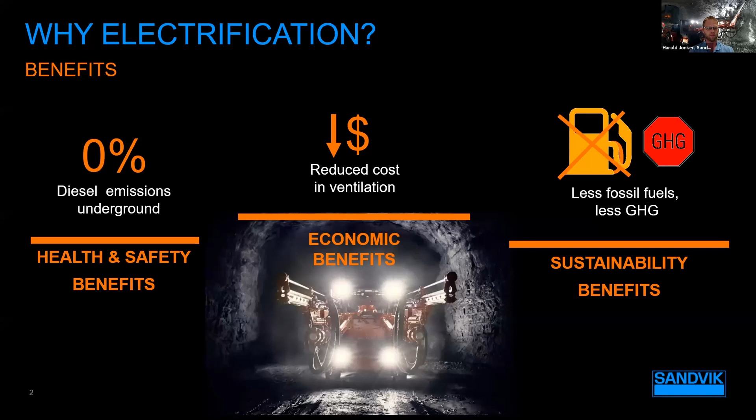Now, I've been fortunate to have joined Sandvik Canada a little over a year ago after spending a decade in Australia, where I was supporting drilling automation projects. I inherited a healthy install base of battery electric equipment, as you can see on the screen here, and I look forward to supporting the industry making the switch to electric propulsion.

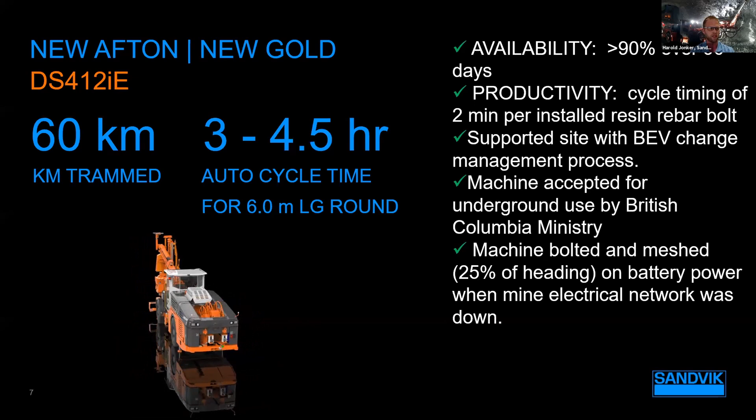On my arrival in Canada, I supported the change management process to introduce the battery electric automated bolter that you see on the screen here. 60 kilometers trammed, 2-minute automated bolting cycle to deliver 6-meter round in about 3 to 4.5 hours. So introduction of battery electric equipment, the change management process, working with the mines department in BC together with the mine to understand the challenges. Great project, and happy to see that it completed its site acceptance test.

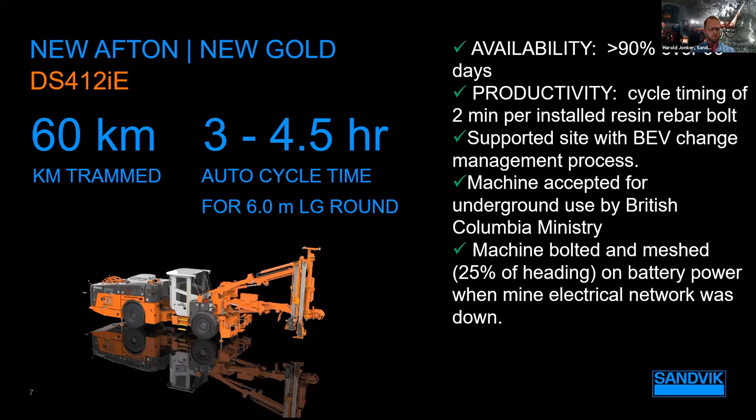Moving on to our Borden Lake drills, where we have several development drills and our long hole drill, so 4,000 kilometers trammed. These drills have been there since approximately 2017, so for about 5 years. And over that time at this site, 1.5 million meters drilled and 0 emissions.

Now, Luc was the former project manager on site. He expressed that he was impressed with the minimized components. The reduction or elimination of diesel engines also means no more oil changes. And being battery electric with onboard charging, no external charging stations are required as well.

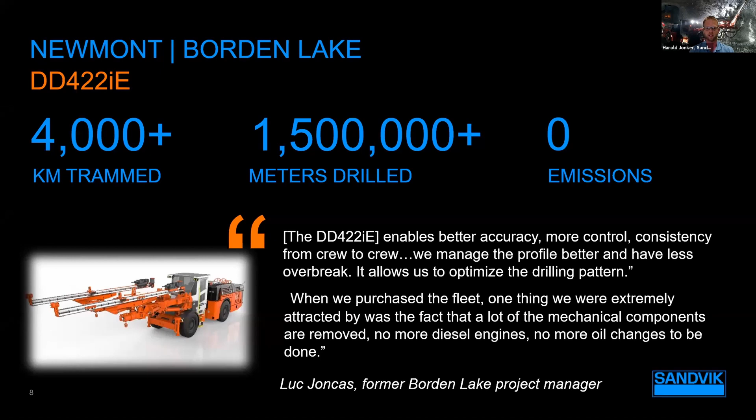So moving to a different product line, I am from the underground drills team, but from the load and haul side at New Afton, we have the battery electric LH518B loader. In addition to 0 emissions, this loader delivered on productivity, with improved mucking time from 9 minutes to 4 minutes compared to the diesel equivalent.

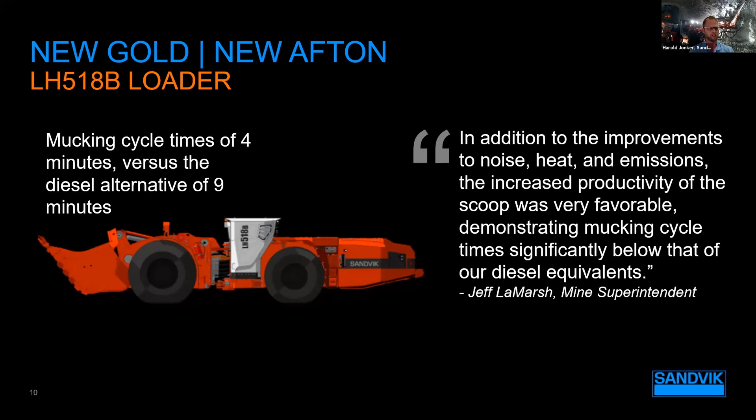And then rounding out the battery electric equipment, we have the Z50 battery truck at Pretium. This showed that battery electric power definitely is a game changer. In addition to zero emissions, it smashed the productivity on site with 42% more tons and 22% faster than the diesel alternative on a 15% grade, and with a speed of approximately 9.5 kilometers per hour.

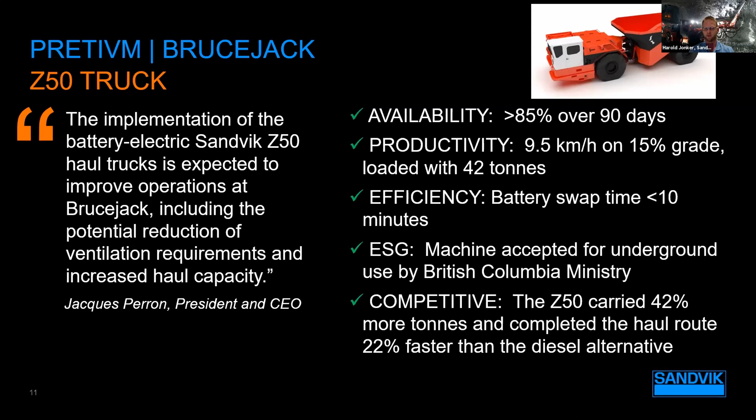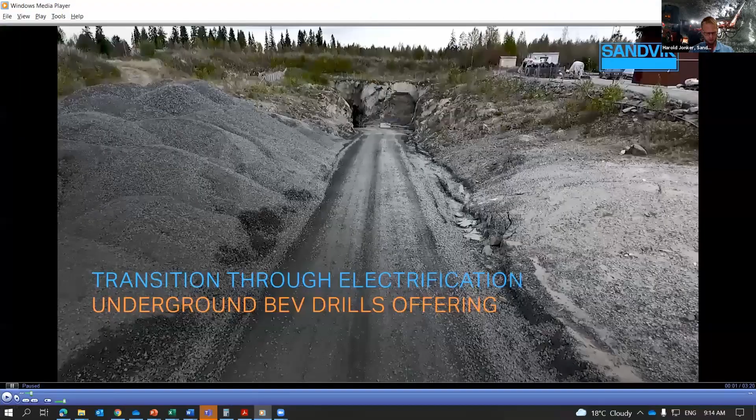So from here, I'll just run a video on some of our battery electric equipment. Hopefully it comes through and it is playing as well. Just bear with me for a minute as I switch that across. Is that still streaming through okay there on your side, Alicia?

I assume it is. Yes, it is. It looks great. Yeah, cool.

So what I'll talk about while the video is playing is a bit more about the savings and the future of the battery electric equipment. And then I'll switch to any questions the audience might have for the last few minutes of the presentation.

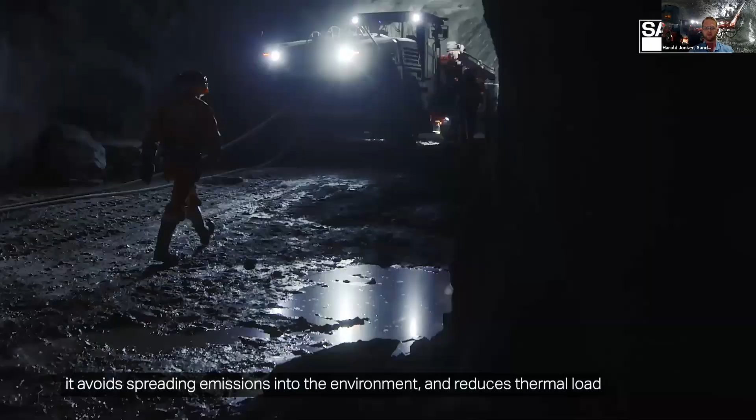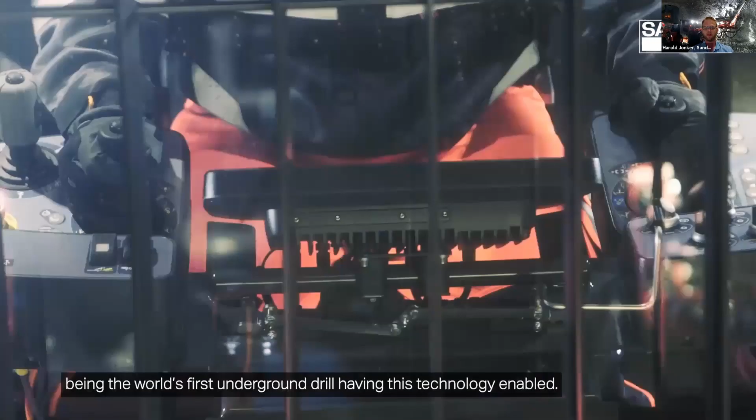So yeah, battery electric equipment, it gives major CapEx savings for an operation. You can build smaller tunnels because the size of battery electric equipment can be smaller with the same capacity. You can install less ventilation, which requires less cooling. And with the OpEx savings, fuel is cheaper. Trucks and loaders, they move faster, so they can move more tons.

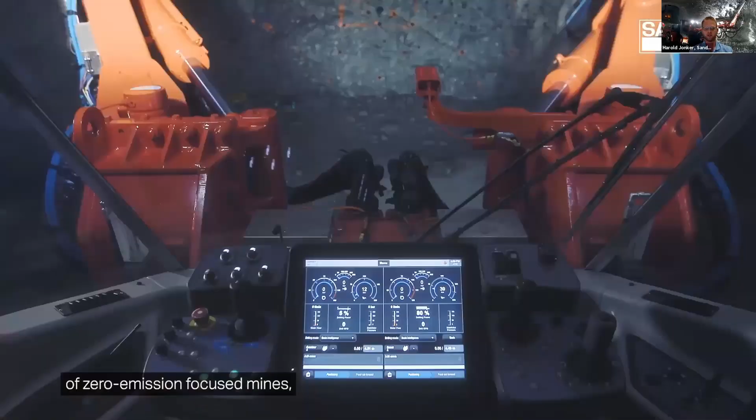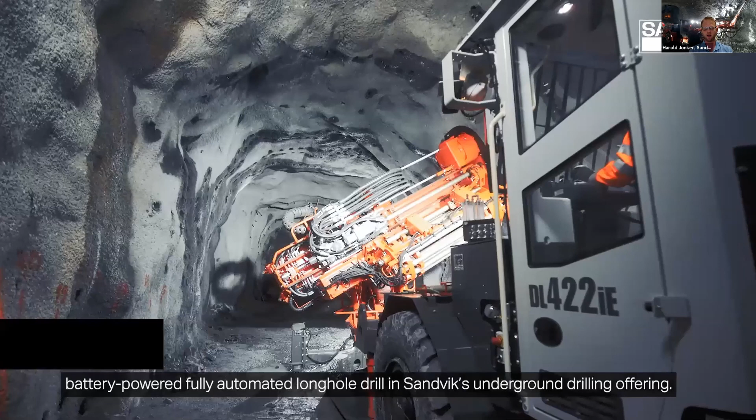Now, if you compare electric equipment versus the traditional diesel equipment today, and if you compare the CapEx and also the OpEx over the full life of the machine, already today they're on par with each other. Yes, the CapEx is higher for the electric, but the OpEx is lower, based on the energy and the maintenance costs. Now, when you factor in the savings the mine makes on ventilation and cooling, there's a strong business case for going electric.

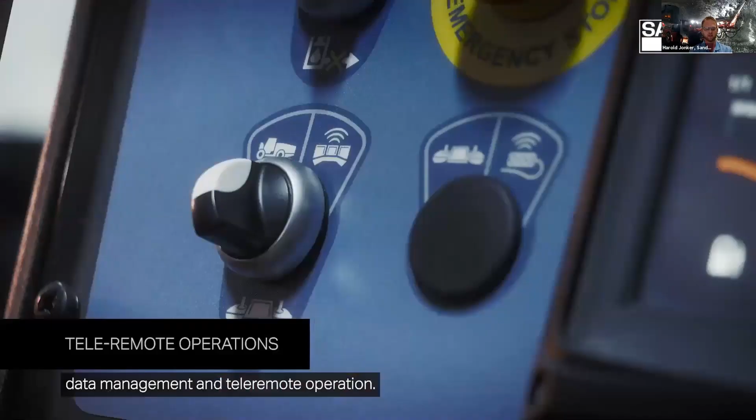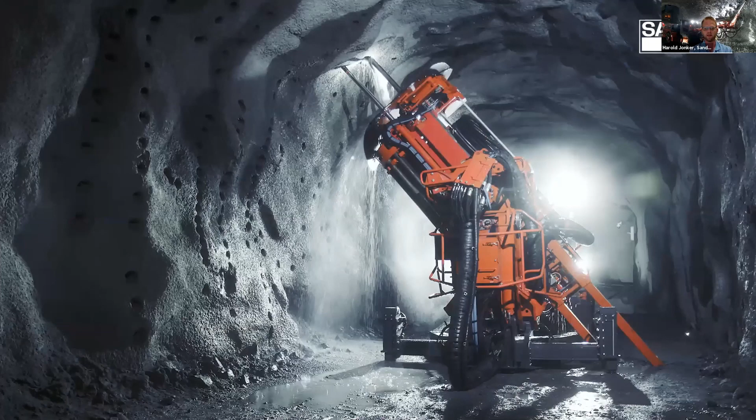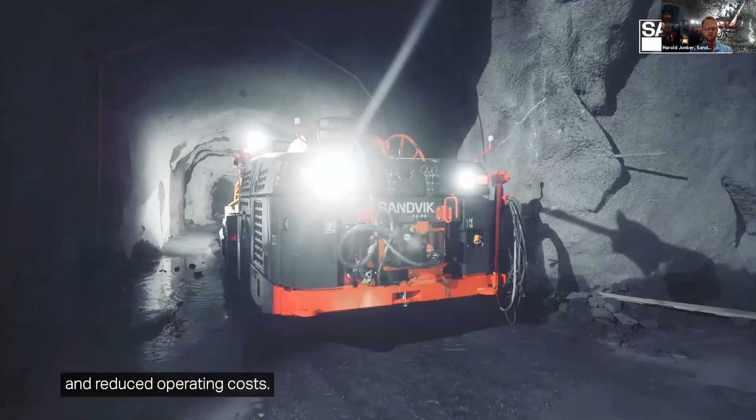So electric equipment, it's exciting. It's exciting because we have the opportunity to change the environment, both locally at the mine, but we can also change it globally. The swappable battery on our load and haul equipment, that's exciting as well. I don't have it playing on the video because this is from the underground drills product line, but the swappable battery, I'm sure you've seen or heard about it. It's just a very practical way of implementing something that's completely new into a mine. And the torque with electric power on these units is just massive.

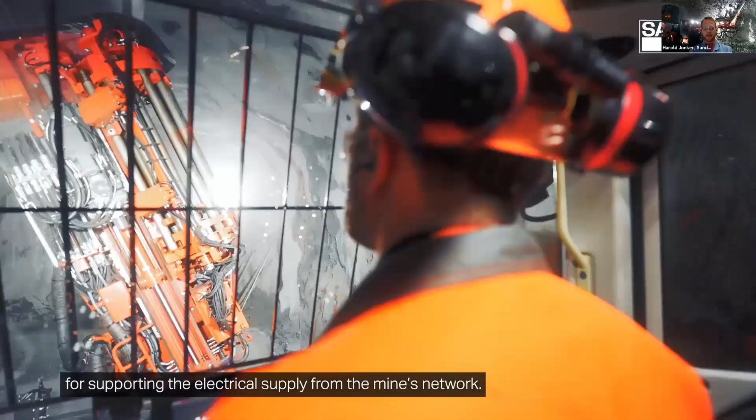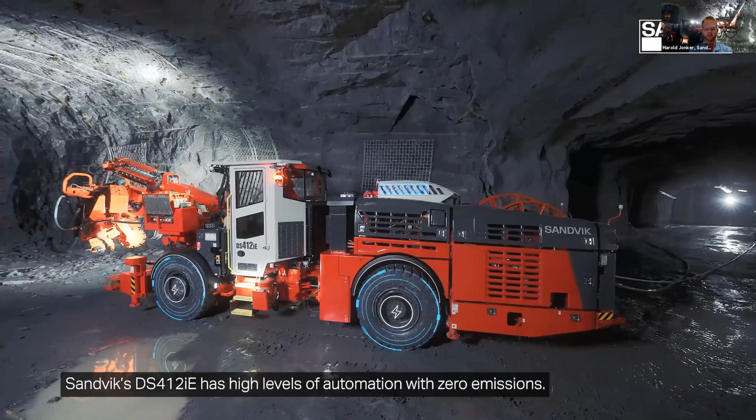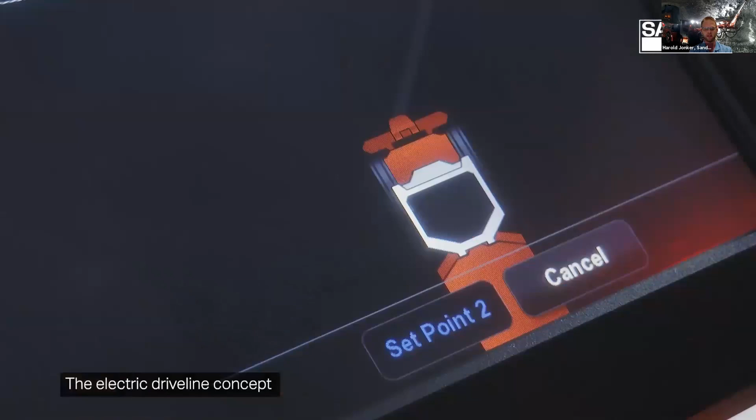So Sandvik is championing the battery electric equipment in mining today. We have the widest range when it comes to the offering of battery electric products, both for underground drills and for loaders and trucks. We have the most advanced battery equipment with battery swapping technology that nobody else has. And we think that in the next 2 to 3 years, every large contract will have electric equipment as a part of it.

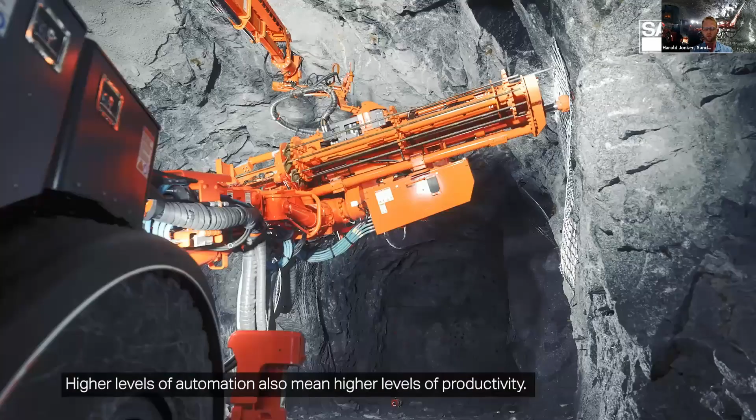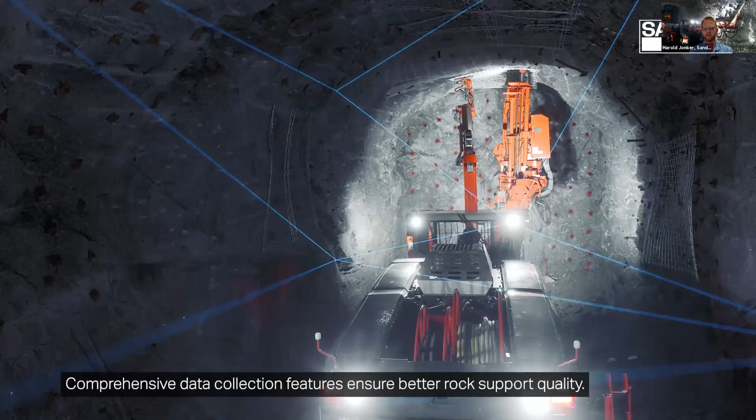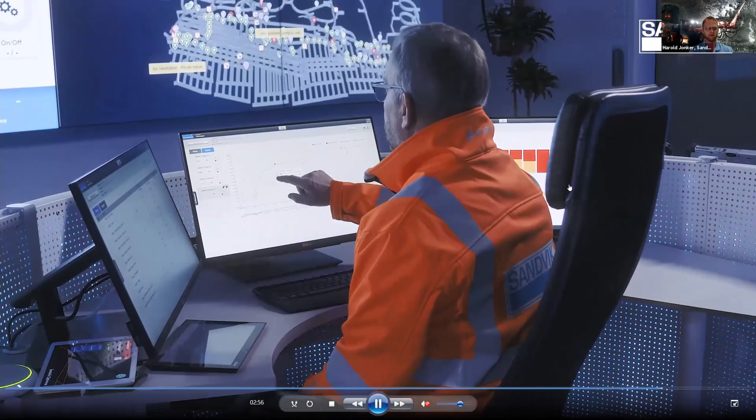So electric equipment has clear potential to be better than the equipment we've had up until now. We've definitely seen that through the various trials and the machines that we have day in and day out in production at mine sites. Now, just to wrap it up, I want to reference Henrik Ager, our president, who summarized the pull from the mining industry on battery electric equipment. Customers expect it to be as reliable or better. They expect it to be as fast or better. And they also expect it to be the same price or better.

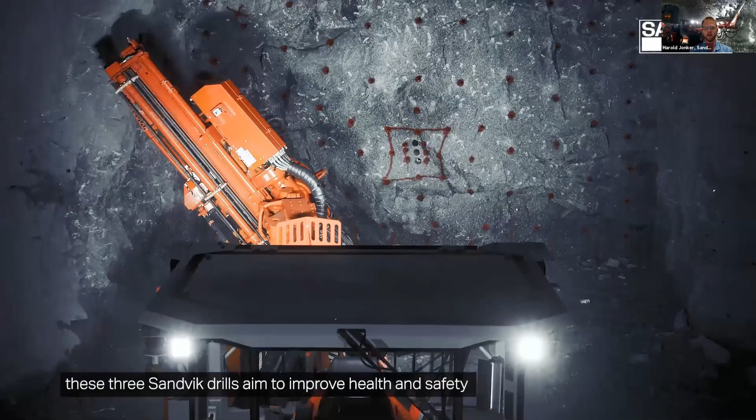And so with that, I'll say thanks for the opening address and happy to entertain any questions in the remaining time. Thank you so much, Harold. We do have some questions coming in. The first question is from Jennifer.

How often do you need to do truck rebuilds with electric? That does vary based on the usage at the mine and also the profile, the ramp, and the loading of the truck. Being that I'm a drills guy, I cannot give the exact answer, but I'd be happy to defer to Brian Huff, who appears later in the panel. Happy to take that question offline, Jennifer, and help you where we can with a cost model to support any studies. And to support that, we're happy to bring in our transfer mine team as well. So appreciate the question. Yeah, we'll make sure to connect with Jennifer to get her that answer.

Thanks, Jennifer. We have a second question from Luke. For remote locations without grid connections, what is the net efficiency after running the generators to charge the batteries? For the net efficiency using a battery electric drill, I'll defer to some of our engineers to get you actual numbers. But what we have found with the power compensation on the drills with power networks, especially when there's poor power at the site, is that it acts like a capacitor, like a bank that can feed back into the mine when it's not using that power to tram or to drill. So there are definitely efficiencies realized that way, but to actually give you the net efficiency, I'll have to get back to you on that one.